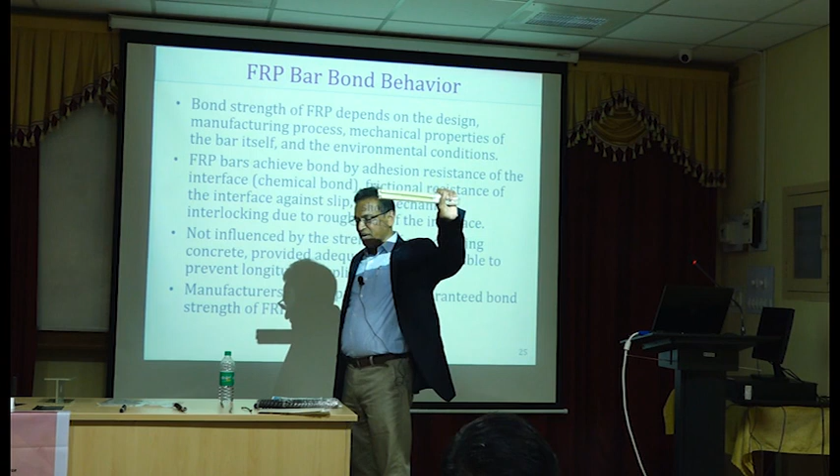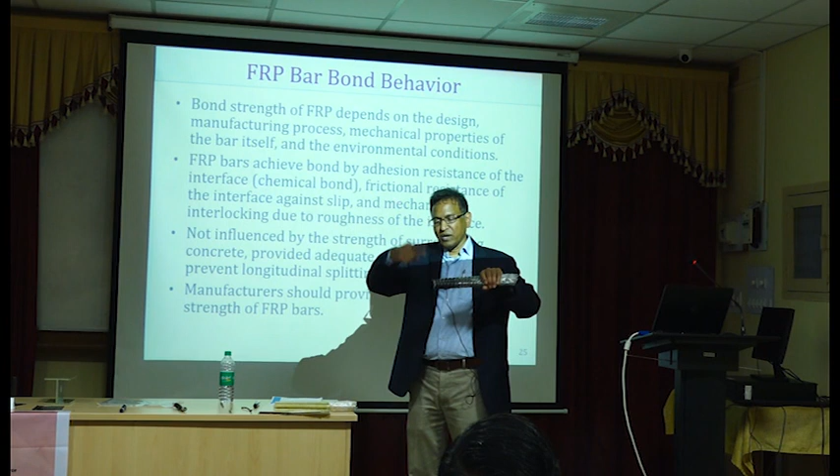Okay. Whereas in case of reinforcing FRP bars, on this we don't have ribs, right? On this we have ribs, but at the same time these ribs are not as efficient as the steel ribs. These ribs can actually shear off, and these are based on spiral fiber, which will give a better bond for sure. But in some cases, some of the producers machined grooves. That is even worse. It won't really help in any way. So bond is going to be a problem.

And in case of FRP, the primary mechanism for load transfer is either chemical bond at the interface or some small amount of frictional resistance. That's all. That's the reason you will see the bond is likely to govern your design. And I'm giving out all my secrets, so pay attention here.

The lack of bond will prevent you from using higher stresses in FRP bar. The FRP bar may have like 800 MPa strength, but the bond will limit it to 150, maybe, or even 175 or 200. So really we are limited by the bond, therefore you cannot use the higher strength. Does it make sense? So we have to check that. I will show you how to check that. We will do that later.

So number one, if we have a higher modulus material, that's very helpful for FRP bars. The second helpful thing is bond. If you are increasing the bond significantly, that will definitely help your cause. Okay.

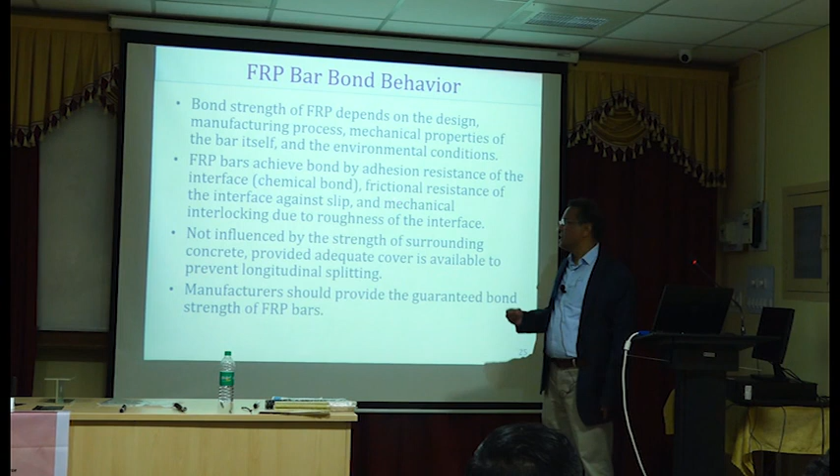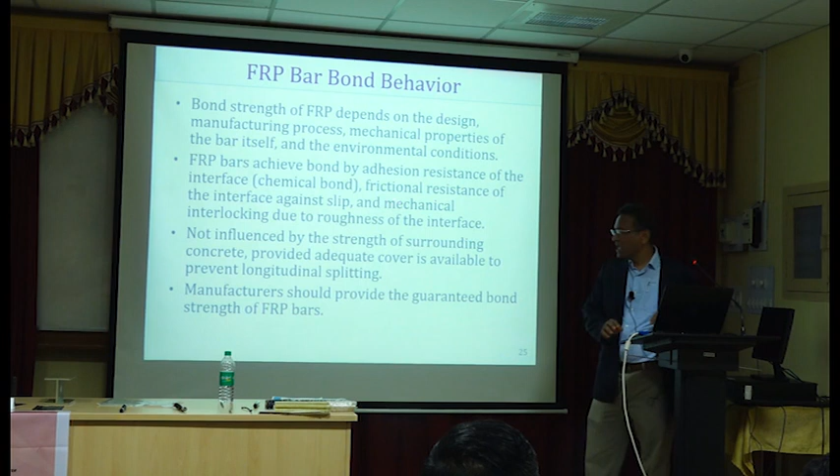And in case of FRP bars, stronger surrounding concrete won't make any difference to the bond strength. Whereas in case of steel reinforced concrete, that will give you better confinement around the ribs, and that's the reason you'll get a better bond strength with higher grade concretes. Whereas with FRP bars, it doesn't make any difference. And the manufacturer should give you the guaranteed strength and stuff like that.

So it's already 1:40, right? I have about 7-8 slides. Should I go over this or should we stop here? Completed? Okay. I'll go a bit faster, we'll be done.

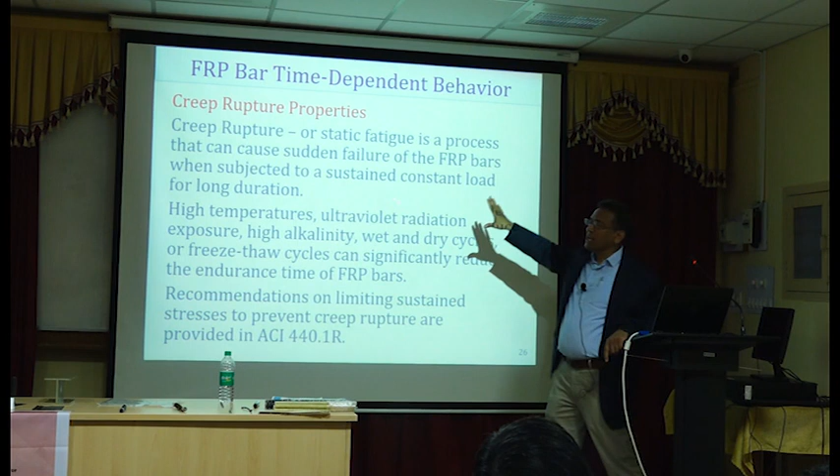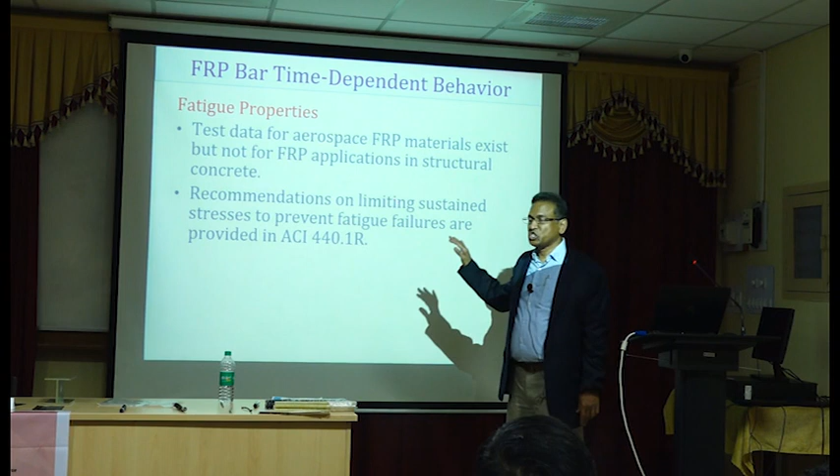So creep rupture strength, we'll come back to this again when we are actually designing it. But for now, just remember that creep rupture strength is likely to be governing your design later. Fatigue properties, one of our students talked about fatigue. He's working on fatigue properties. Fatigue properties are indirectly checked in this document. There is no direct checking of fatigue strength. So again, we'll talk about it when we are dealing with fatigue design.

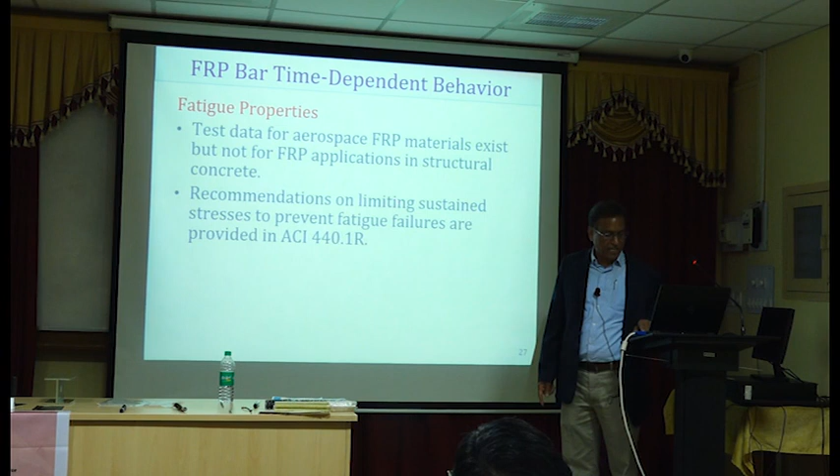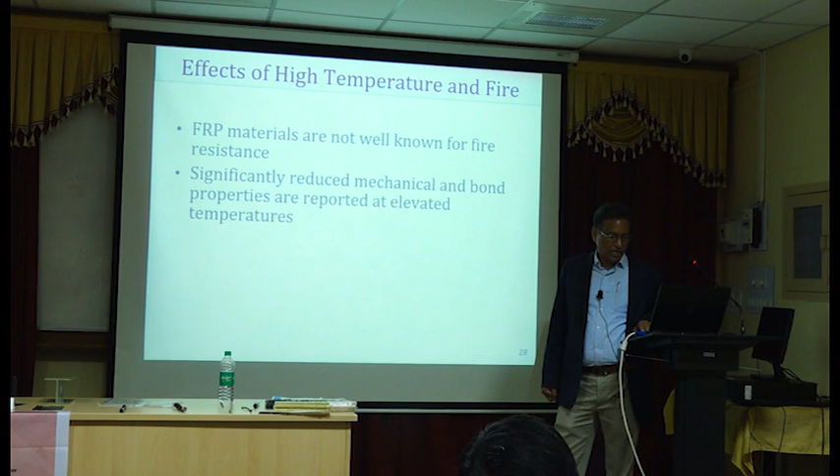High temperature and fire: it's not a very good material for high temperature and exposed elements. Durability. So again, tensile strength and bond strength are more important in FRP reinforced concrete. Durability is still a very, very gray area. What I mean by gray area is we don't know much about durability.

So if some of you would like to do some research, durability is a good topic to pick up, to do some research on FRP related materials. It's a good thing to do, but you may not like the results. I'm sorry, because we have already done that. So I know that the results are not very attractive to the manufacturers. So they don't want to give you money when they know that it's not going to give them good results.

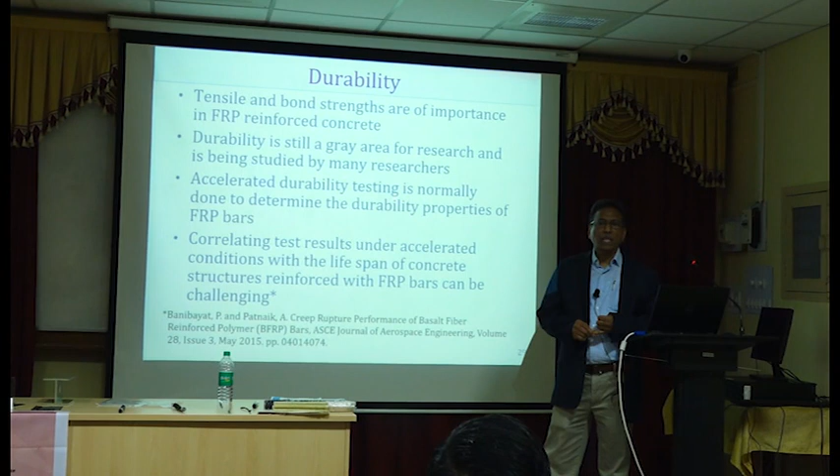So that's a problem. But it is what it is. So we publish our work, let them look at it, do whatever. It doesn't matter. To me personally, it doesn't matter. So durability is an issue that one should consider, because you'll have a lot of problems with exposure to alkali environment.

Test result. Again, the other problem is all these durability tests ideally should be performed over many months or even years, right? Like 5 years, 10 years. But you want instantaneous results. I want results now, right? The guy will come, I'll write a check, no problem. I want your results tomorrow. How do I do that?

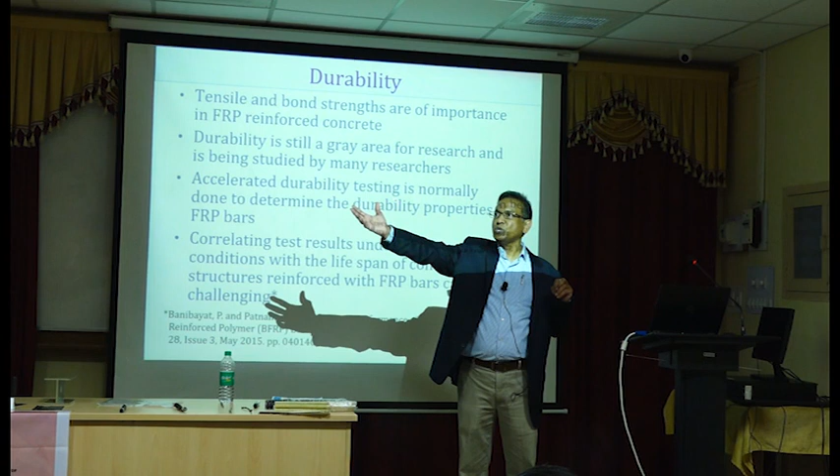You cannot do it. So you find ways to correlate accelerated tests with actual normal exposure tests. Very difficult. How do we correlate these two? Same problem with corrosion. Many of us, we do a lot of accelerated tests and corrosion tests, but people turn around and say, okay, but how do I relate actual durability over 100 years to the accelerated test that you are doing right now over just less than 3 months?

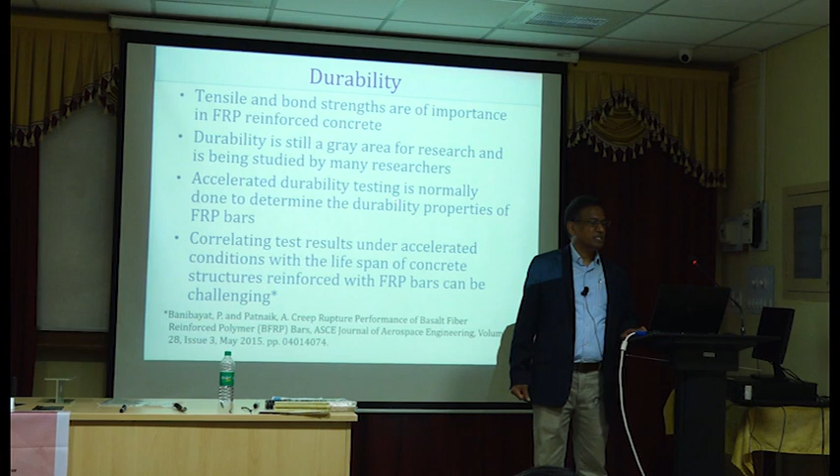That's the problem. So that's another thing that if you like to do research, that's one area which is a good area to work on. Okay, now there is a strength and modulus grades. I will jump to the next slide and I will tell you what it is. Okay, maybe this, yeah. See, we have a bar identification symbol in ACI.

So here we have 3 letters here, dash, G for glass, C for carbon, and A for aramid. You can use those standard notations. Or you can use B for basalt, but basalt is not recognized in ACI yet. Then F80, F for tensile strength, guaranteed tensile strength. 80 is 80 KSI actually, and 80 KSI works out to be about 550 MPa in this case. So if you are specifying something like this, that F80 means 80 KSI tensile strength.

E is modulus, 5.7 MSI, million pounds per square inch. So 5.7 million pounds per square inch will give you 39.3 GPa in this case. So depending on your bar, you can change this. You can say E of 9, let's say, which is difficult to achieve, but if that's what you are specifying, the producer should give you a guarantee that the material he is supplying will have 9 MSI modulus. So this is how you classify or identify your bars.

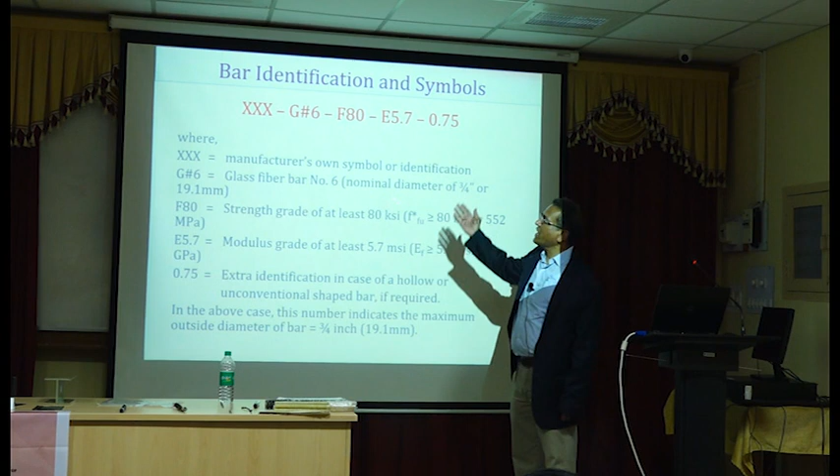You are not going to say you must buy your bar from Hughes Brothers. You cannot say that. You cannot say you must buy your bars from so and so. You cannot do that. So you give the properties, minimum properties, and they should match those properties. They should make sure those properties are achievable for their product. Only then you can use those products, right? So you don't want to include bias in your specification. So I'll go back to this.

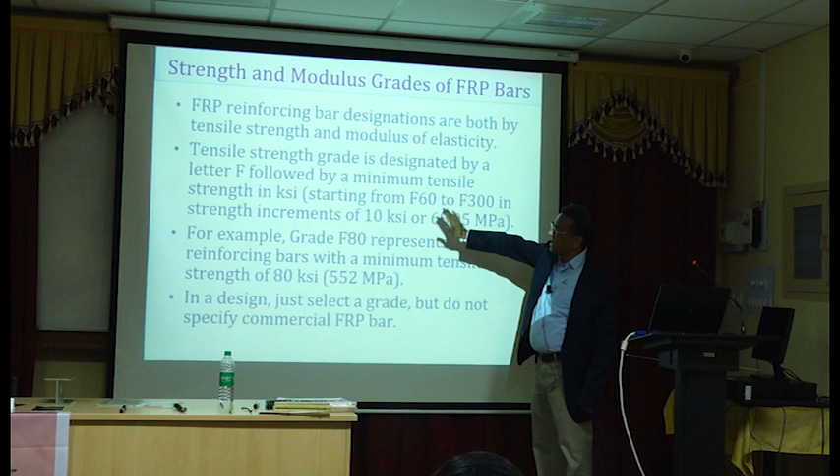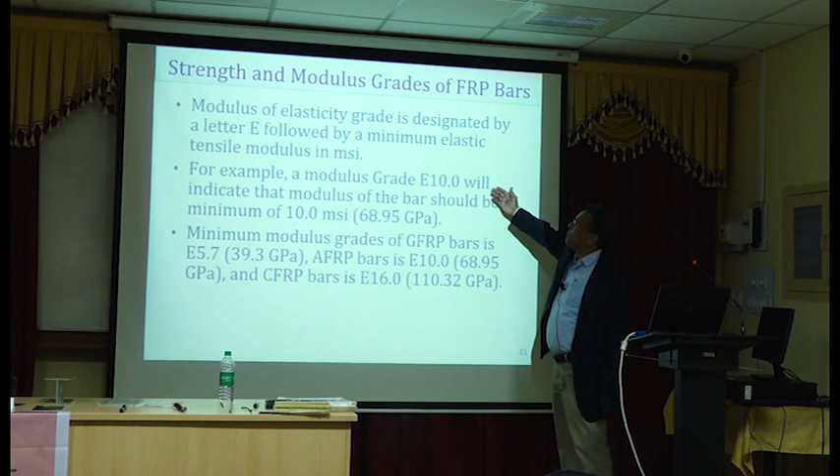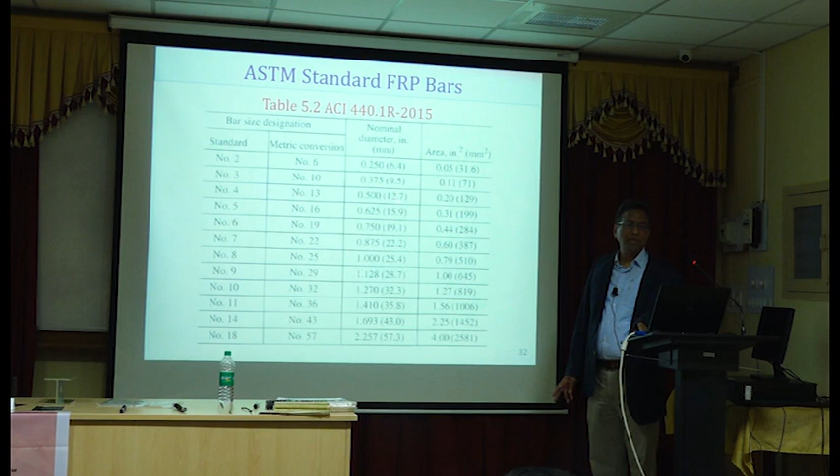So this is what I already mentioned. Letter F followed by minimum tensile strength in KSI. And then letter E followed by modulus in million pounds per square inch. So for example, if you have E10, that will mean you should have a modulus of at least 68.95 GPa. And then ACI also has a table which is similar to what they have in Hughes Brothers. In fact, it's the other way around. Hughes Brothers matched with the ACI table, and they have similar physical properties, except that the tensile strength and modulus are based on their own product.

So with that, we can finish for today, and we still have quiz number 2. I think you got quiz number 2. We will send you the files. I'll send you 3 files. One with the slides, one with my notes for micromechanics, and the other one is the Excel spreadsheet. So if you want to use the Excel spreadsheet, use it. If not, you can do hand calculations. If you're more comfortable using hand calculations, so be it.